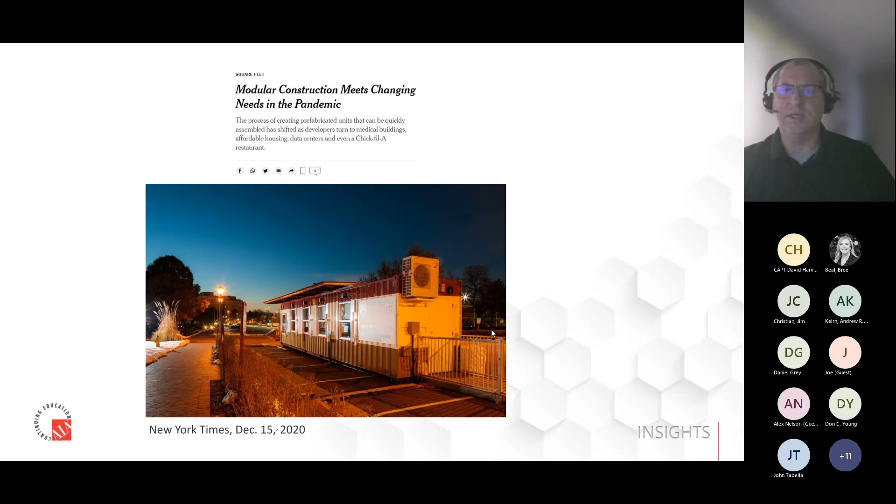So moving forward, the pandemic, recent history has really put a spotlight on modular construction. We've seen a lot of these testing facilities and the need for healthcare facilities to be brought to light pretty quick. So we've seen these buildings kind of pop up. Probably seen this in the headlines too, right? How can a hospital be built in 14 days? Utilizing all pre-built, pre-manufactured components.

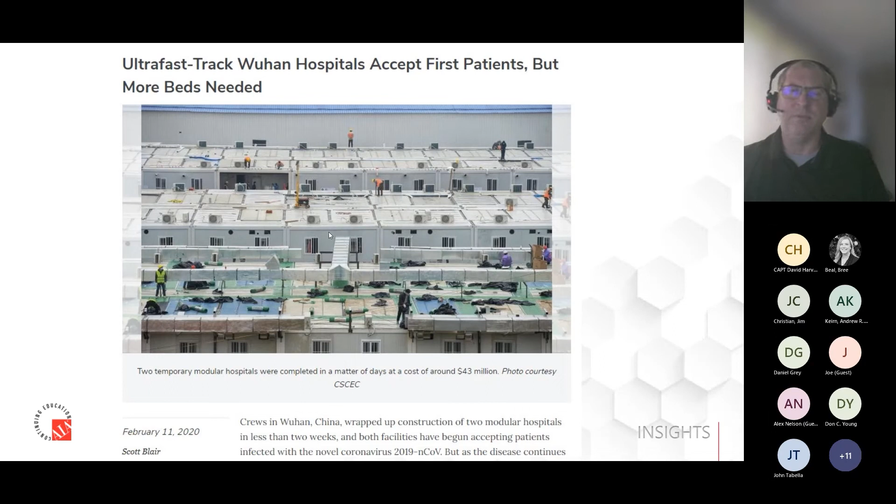So when we talk about modular construction, what are we really talking about? We're talking about off-site construction. There's a lot of terms that have been used: permanent modular, temporary modular, factory-built structures, pods, which are really like a bathroom type of unit, hybrid, projects that take parts and pieces of modular as well as conventional, and prefab. For the purposes of this conversation, I'm going to use the term modular construction, but it may apply to all these different terms.

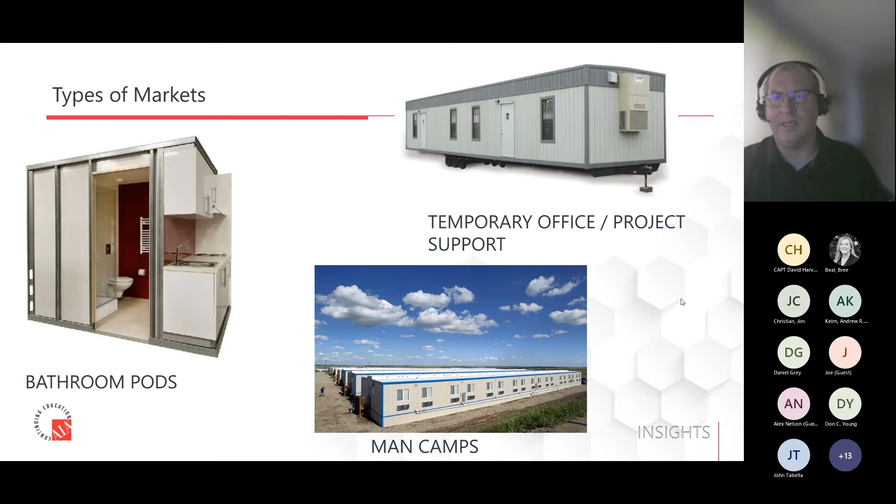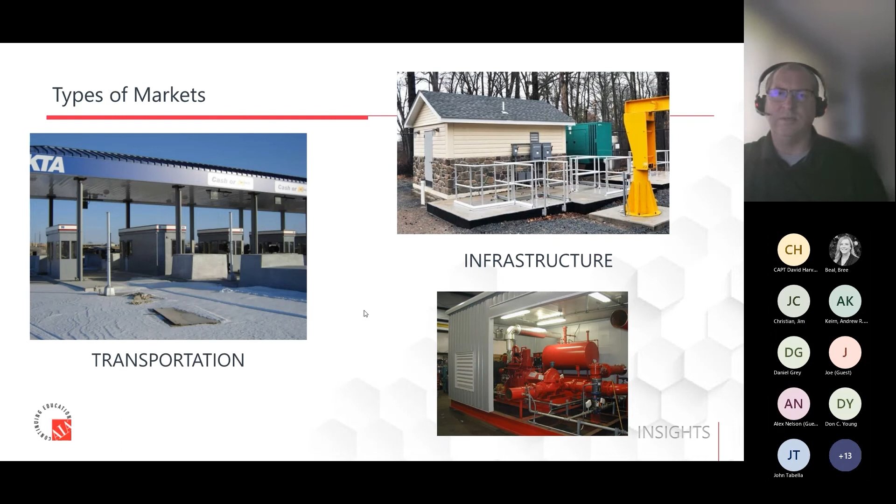What type of markets do we see in modular construction? Multifamily, mid-rise, single-family residential, of course. We have the ubiquitous trailer or temporary office project support. These are those bathroom pods I was talking about earlier. Man camps. And then, of course, commercial, healthcare, institution, transportation infrastructure. And you'll see one of the slides towards the end to be institution and federal type projects.

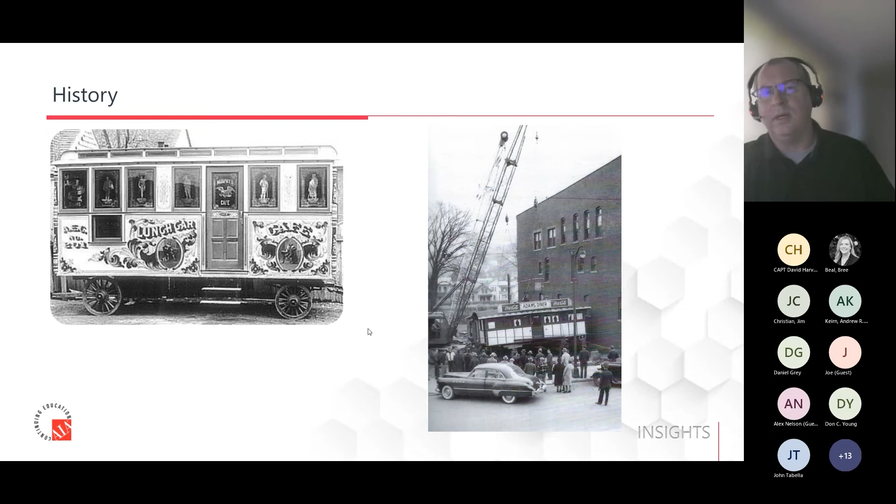A little bit about the history. There's been a lot of buzz recently. People seem to think that modular construction is a new modern technique, but really we could trace it all the way back to the beginning of the Industrial Revolution, where we had all these factories coming online, and the factory workers needed a very informal, very quick place to get something to eat. That gave rise to these mobile eateries, which then morphed into our modern day diner, as the interstate system of the United States picked up and weary travelers needed some place to stop and get a bite to eat.

So they transformed those carts, those horse-drawn carriages, into places where you could stop along roadside America and pick up. And that's what evolved into these shiny neon 24-hour places to stop and rest and get a bite to eat during your travels.

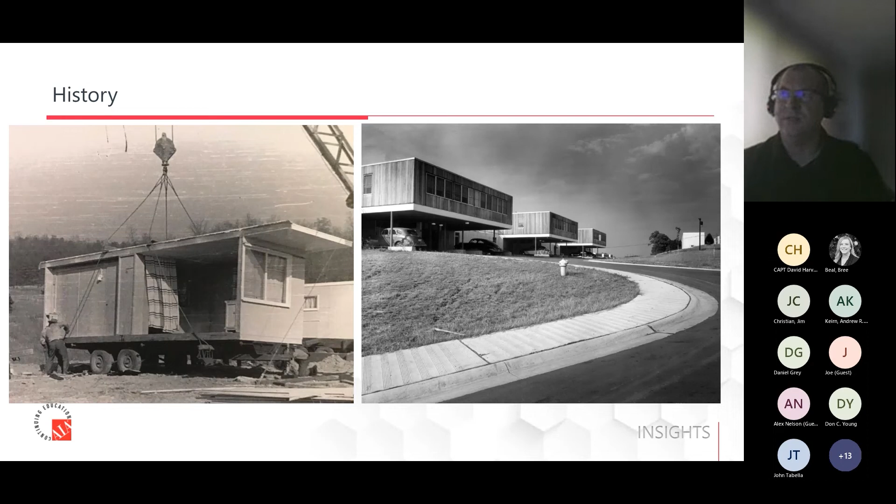In addition to that, back in the fall of 1942, the U.S. Army Corps of Engineers began to acquire vast tracts of land in 3 areas: Oak Ridge, Tennessee; Los Alamos, New Mexico; and Hanford, Richland, Washington. These 3 areas helped develop the Manhattan Project and supported all the workers, scientists, and support staff needed for that effort. This was done in about 2.5 years, back in 1945. None of those places would have been able to ramp up quickly and really affect history if it wasn't for modular construction.

1967, World Expo, Moshe Safdie experimented with modular housing using pre-manufactured concrete, creating about 354 identical prefabricated units. It was a somewhat successful exploration of modular housing. However, it was so popular that the value skyrocketed and economically it didn't turn out to be the best use. But again, in the mid 60s, architects were experimenting with this type of construction.

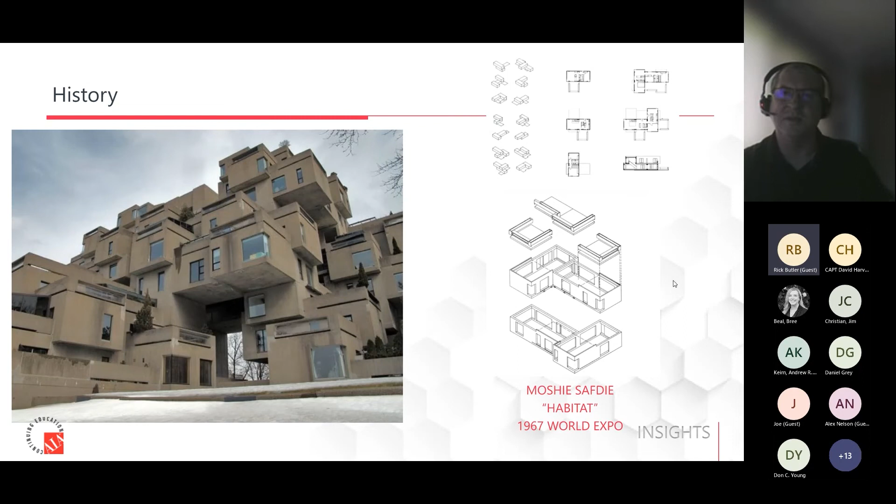Disney theme parks. Disney has used a lot of different modular techniques extensively throughout the creation of their parks. And over 30 years ago, there were modular manufacturers building multi-story, campus-sized projects. So again, modular construction isn't necessarily a new technique or new technology. It's been around. It's just been continually improved over time.

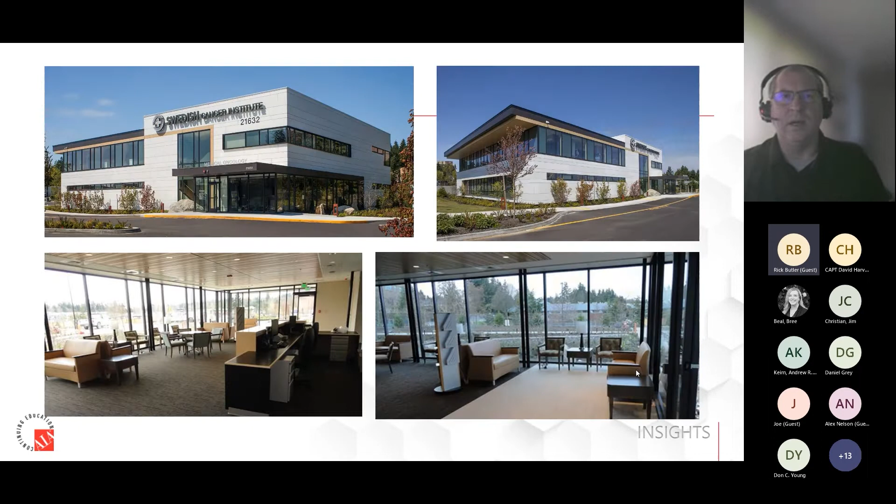The industry has been adapting it. The AIA provides a guide on modular construction. Clemson University offers classes that you can take on modular construction. So, and again, I'm sure everyone on the phone call here has heard about it, has experienced it, has somewhat been affected by it. Modular construction has, and we're seeing the popularity kind of grow in this market, in our industry, and it's starting to really take off here and be good.

So what do I believe are the values of modular construction? So if you have a project that has a time component, has a technology component, or has a financing component, those are probably the 3 biggest items or value that using a modular-based project would help. I'll talk a little bit more about these.

So time, the biggest time is that you're providing your client with a solution months ahead of schedule. For projects that are revenue intensive businesses, the results can be significant. Great example of that is the cellular phone industry. At the time it was AT&T, Sprint, and I forget who the other player was, but obviously the first people to get up, get their towers and get their cell units up and running as quickly as possible, that's where they gain the market.

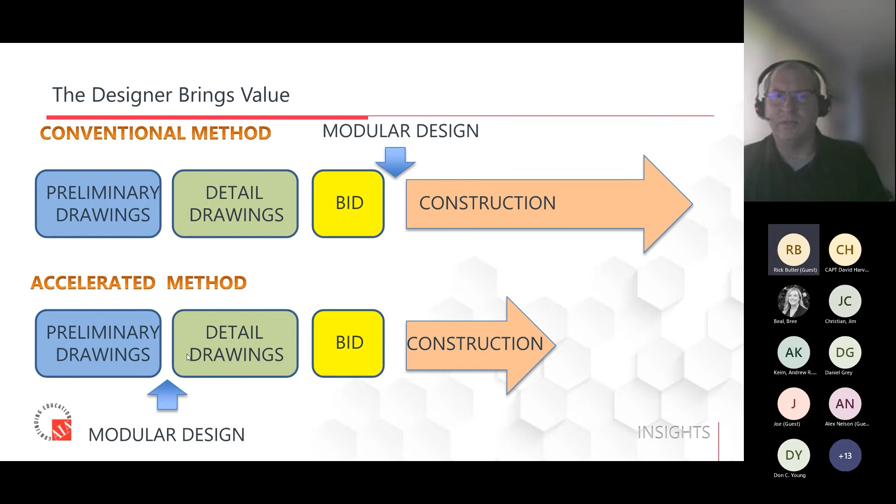So as a designer, where could we bring value by using modular design? The best area where it would be advantageous to introduce modular design is right in the preliminary stages. And I'll talk a little bit more about that on some further slides about why this is important. But typically, a modular design is really kind of brought in after the bid because there's the thought that modular design might be a little cheaper or more cost effective, which may not necessarily be the case. But if you're looking to provide your clients with an accelerated schedule, right after the preliminary design would be the best time to do that.

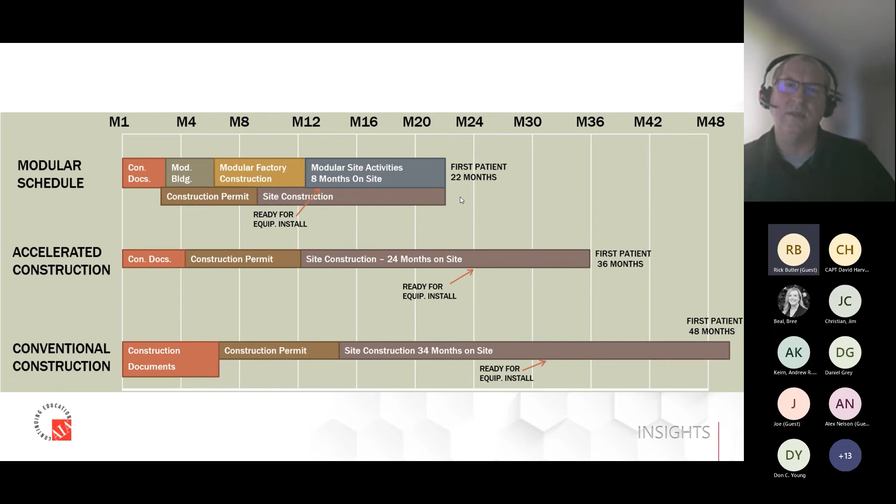Technology. There's a lot of different building types and approaches that may benefit from modular construction. Sometimes factory construction may offer superior solutions over local or regional resources, especially if you're building in remote parts of the world where you may not have materials available to you or the local workers to put that project together.

And one of the bigger, more important items is the relocatability. Some modular buildings, if they're designed and planned accordingly, the ability to be relocated offers clients a lot of business flexibility. I've seen clients that have wanted to test markets and not wanted to create a permanent solution in one place. So they developed a project that could be moved to test different markets. And then depending upon the outcome, they would expand or further their offerings.

Financing, and this could be a presentation on its own, but again, I'm providing a brief overview here. So modular buildings can be treated as personalty instead of real property, creating accelerated depreciation opportunities. And depending upon if your client has available capital or has capital issues, this is something that may be very valuable to them.

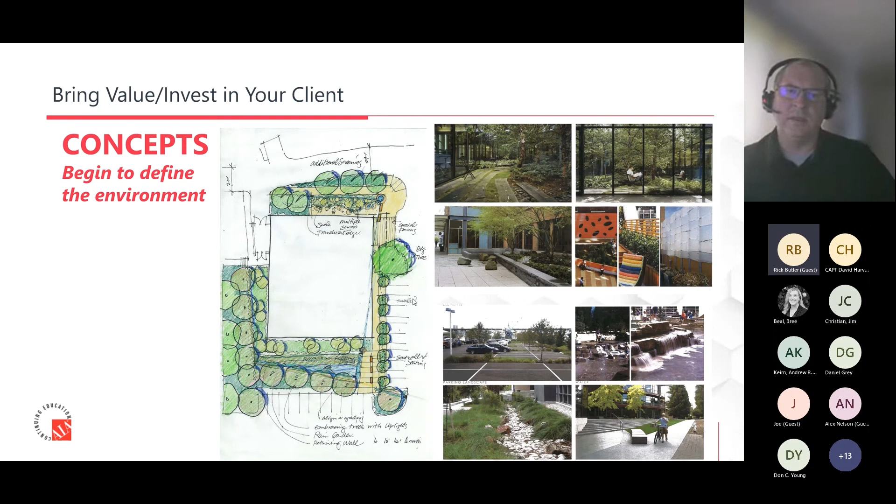In order to promote that, like any other project, you want to invest in your client, create concepts, begin to define the environment, kind of be the proponent for selling modular construction, show them the benefits, kind of bring them up to speed and be a champion for that.

So you have a client, and 2 or 3 of the previous items kind of qualify the modular building fit. There's a time component and a financial component that the client's interested in. They said, okay, go ahead, start moving forward with the modular solution. We want to really learn more. So as architects, designers, constructors, we start looking into the modular industry and seeing what kind of solutions are available.

The biggest question that I would advise, when you're looking into the modular solution and you start contacting different suppliers, manufacturers, dealers: are they selling a service or are they selling a product? Within the modular industry, there's dealers, there's manufacturers, there's contractors, there's design builders, and each one of them offers a different part or piece. And it's really helpful to know exactly what they're going to do.

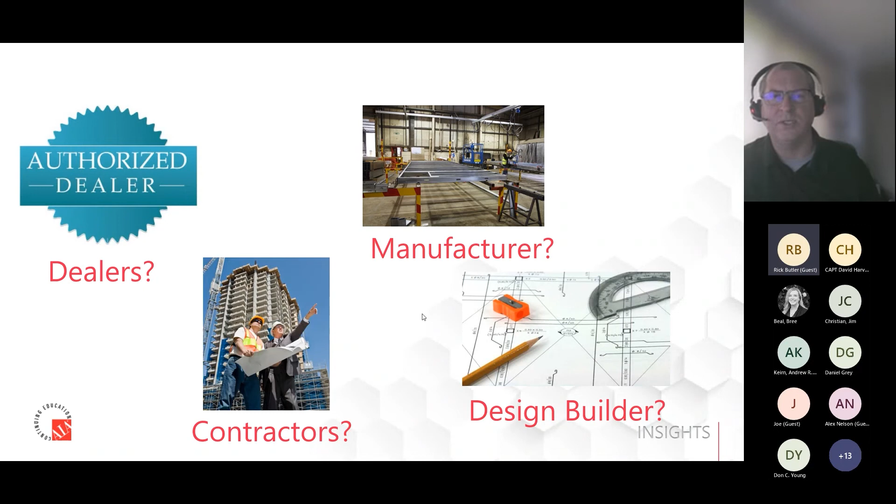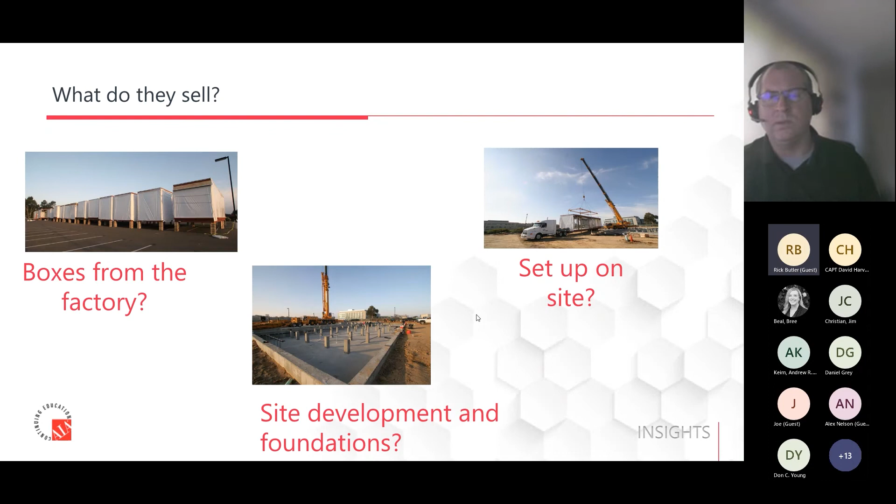Do they just provide the boxes from the factory? Do they also do the setup on site? Do they do the site development and foundations? And so as you're evaluating your strategy, these are some questions to ask. Because the industry has grown so much recently that there are different parts and pieces, and you want to know what you have to prepare for, what you have to plan for, what you may have to document, what's going to affect the outcome of this project.

Do they also sell equipment? Do they also do design services? Do they also provide the financing? So again, there are people that will provide full turnkey services. There are also people who will just do the box and say, here you go. It's up to you or your contractor or your architect to figure out how to do the site, how to make it work.

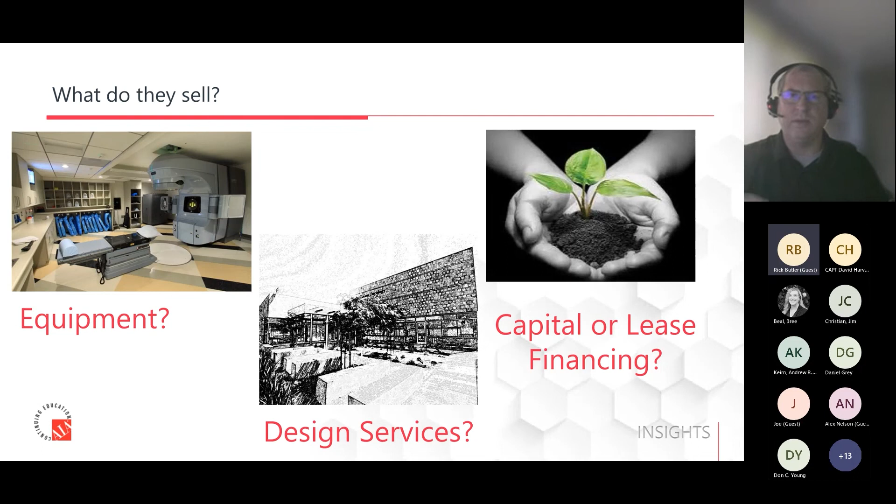So how do you compare companies and solutions? Much like you would any other product, right? Scope comparison. You're going to take both scopes side by side, evaluate them with your team, see who's providing what and what's going to provide the best solution. Of course, cost comparison always plays a big part, depending upon what your outcome is and where your budget falls.

Sometimes modular construction is not necessarily the best solution, especially economically. A lot of people seem to think, at least in my experience, that modular construction is cheaper than standard construction. And that's not necessarily true. There's other aspects, and I'll get into them in a little bit, that may affect that cost.

History of performance is extremely important, especially in the modular building industry. If you're looking to do a 3-story commercial type building, perhaps the guy that's building the construction trailers says he can do it, but he may not be able to. So certainly look into resources, see what projects they've done. Again, this parallels conventional construction: looking at the history of performance, looking at client resources and past customers and getting their take about what they were able to provide and how that building turned out.

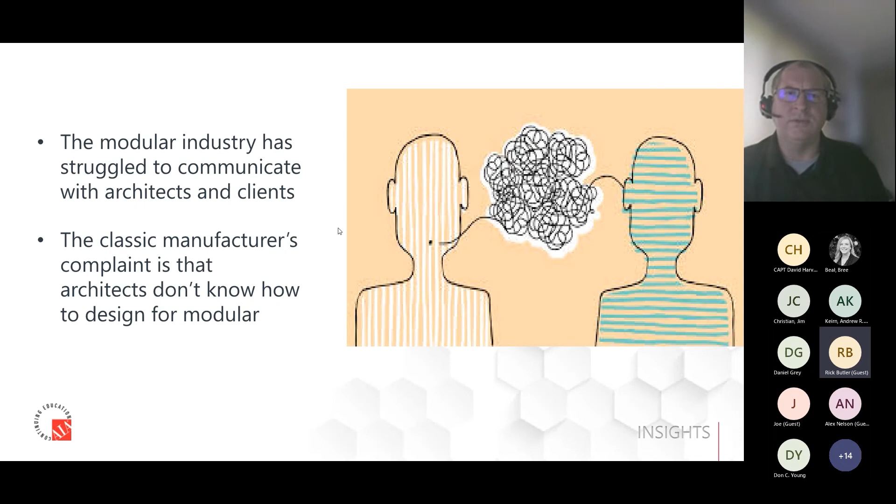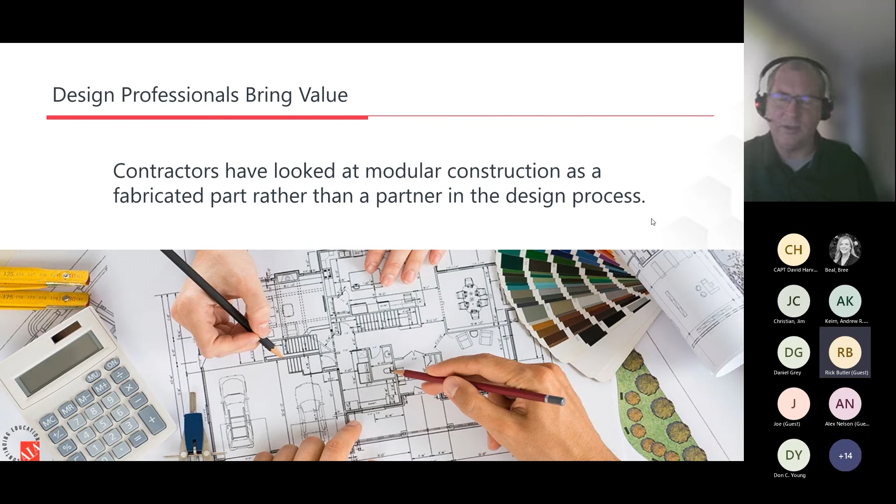So as a design professional, it's been my experience, even when I was on the contractor side, that contractors look to modular construction as a fabricated part rather than a partner in the design process. And this ties back to what I was just talking about: you definitely want to have an integrated team that has started right from the beginning that can help bring all those values of the time and the technology and the financing and create a cohesive project.

So a little bit more specifics about modular construction, creating specifications and thinking about different parts and pieces that go into this from a very high view. Bidding the project versus sole source has always been one important topic right off the bat, and that may even determine whether or not a modular solution is really the best solution, because like with any commodity, if you're going to go with the lowest price, it may not be the best product, especially if it's through the bidding process.

Again, I spoke about this. Involve the modular manufacturer from the beginning, right? If possible. Sometimes it may not be possible during the design, in which case, if you think you have a project that may lend itself to a modular solution, look for a professional.

So where do we leave off? Details, coordination, connection, systems, and scope. There are 2 or 3 other layers of coordination that will be needed if you decide to go with a modular construction solution. There's going to be mate lines, there's going to be mechanical coordination, other elements that will have to be discussed and coordinated. So there will be a little bit of extra time and effort involved with that.

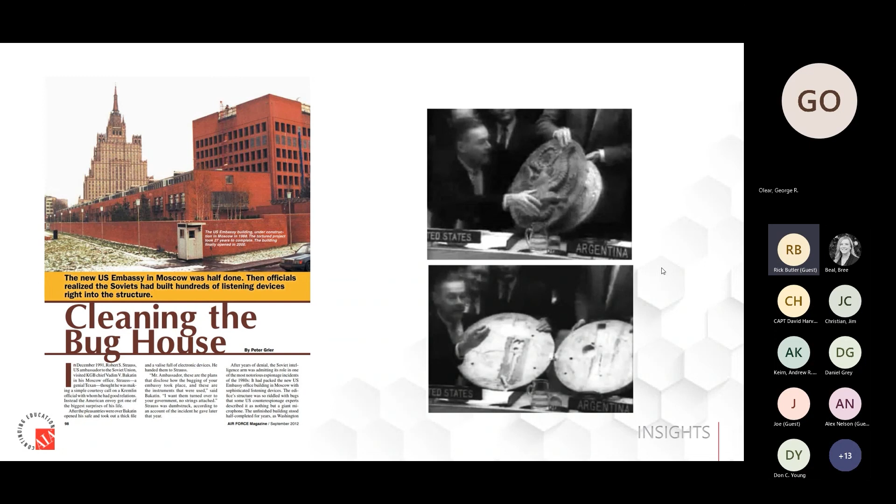So the first project that I'm going to highlight that may not have been possible without modular construction is a modular embassy in Tajikistan. This project was really born out of, I think everyone knows about the bugging of the Russian embassies and the security concerns that were created. So a modular building company at the time had an idea that, well, we can really solve a lot of this if we perform some of these processes off-site and bring the building to the site. We can build the building in a controlled environment with all the security concerns in place, and provide that as a value.

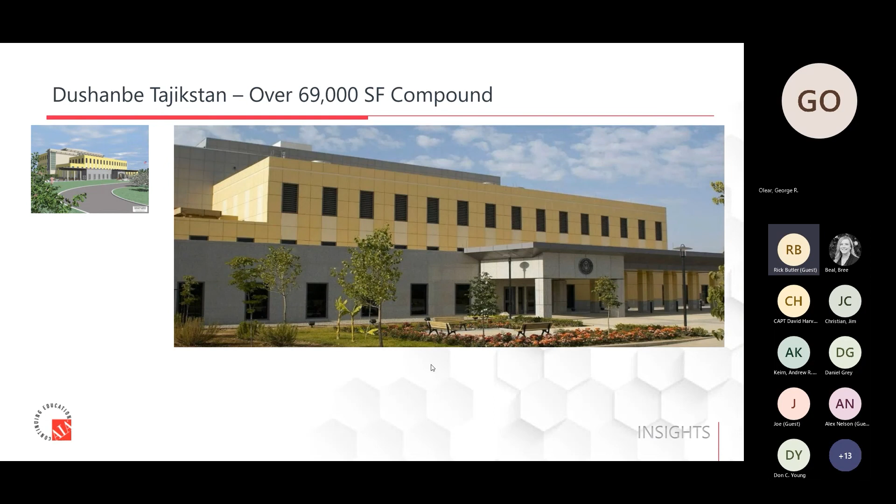There was also a time component to this project. This project did need to get up and running very quickly, and having a modular building approach when compared to conventional construction on site, there was value there. And the same thing with local resources and materials. There really wasn't that skilled workforce available at the time that could provide this type of project.

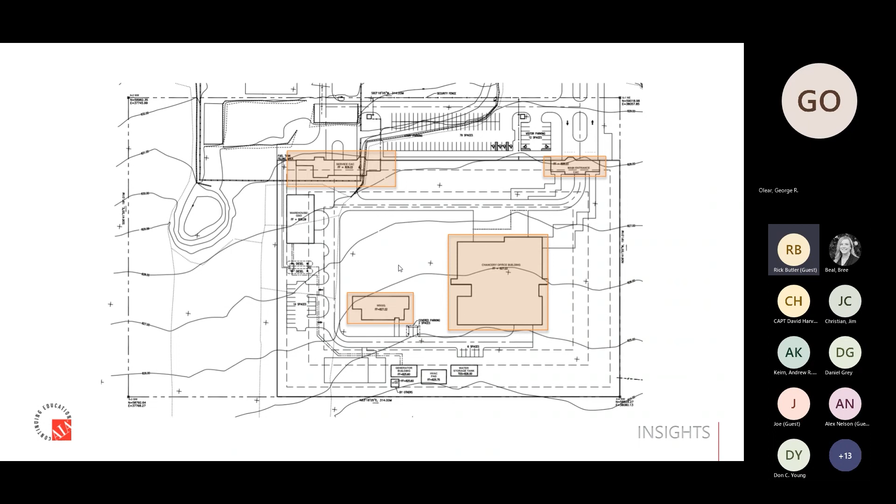This project actually consisted of four modular buildings: the chancery building itself, the two controlled access points, as well as the Marine Guard quarters, all modular buildings that were built off-site and transported and moved to the site.

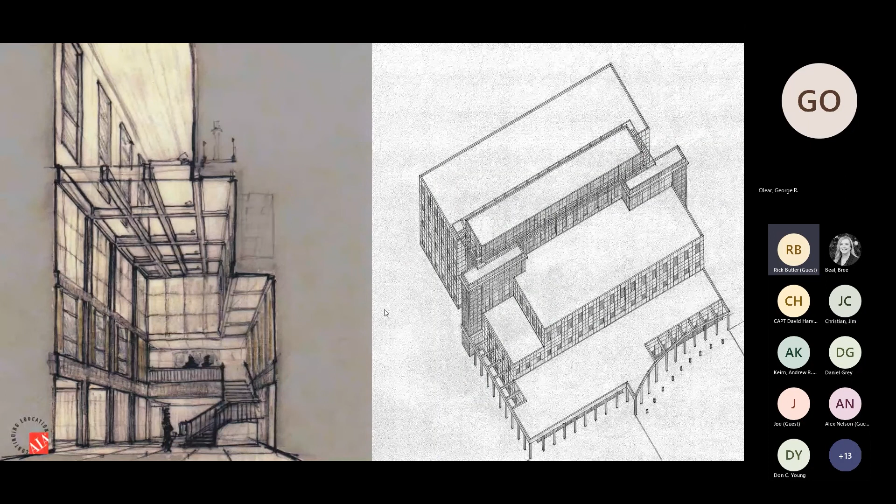Again, we started right from the beginning, right from day one. We approached this project, wanted to integrate our client, wanted to show them what was possible, wanted to engage them and sell the process to the client through different forms of architecture and drawing and get them engaged. This building benefited significantly from the use of modular construction. So some of you may be aware of the standard embassy design.

This project was based upon that concept, and it lended itself very well to modularity based upon the 3 by 9 meter grid that was part of that initial standard embassy design by the State Department. These modules were 3 by 3 by 9, and afforded us to break that plan down into multiple parts and pieces.

The plan itself, or I should say each module, was 9 meters, in which case you'd have a cluster of 4 columns. We did have intermediate columns that were spaced, but again, since the modular builder was involved right from the beginning, there was a lot of discussion about where those placement of columns can occur.

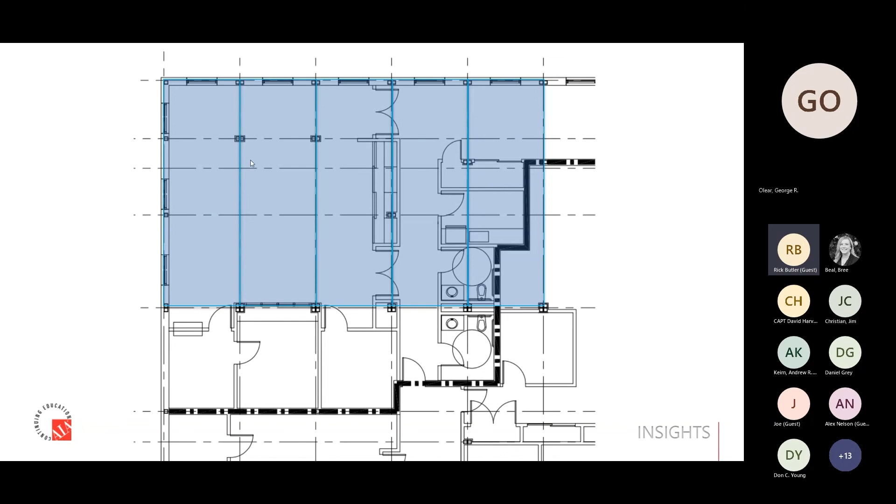So one of the reasons why this was achievable and able to be modular was typically a lot of the forced entry requirements, ballistic requirements, were traditionally done with concrete, different thicknesses and things. And the modular builder came up with a unique solution of using a combination of steel plate and steel tube systems, which adhered to all the State Department guidelines with regard to security and blast resistance, and provided the ability to make this a modular building and be built in the United States and then shipped overseas.

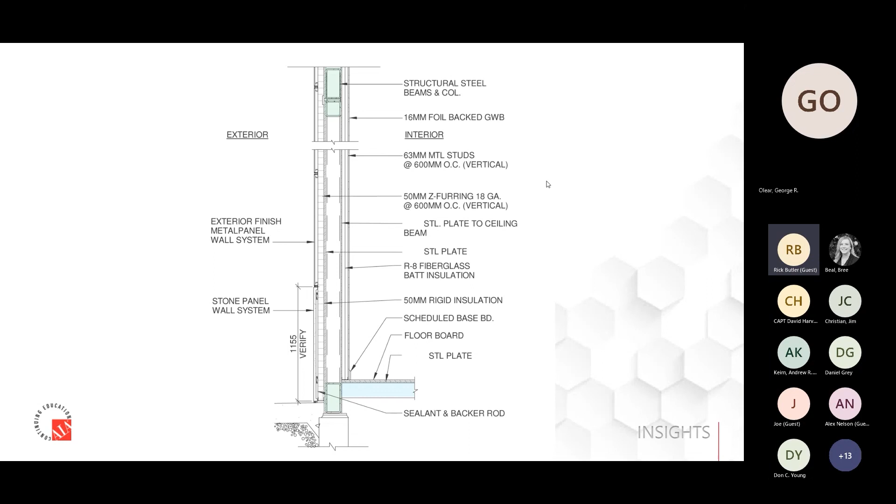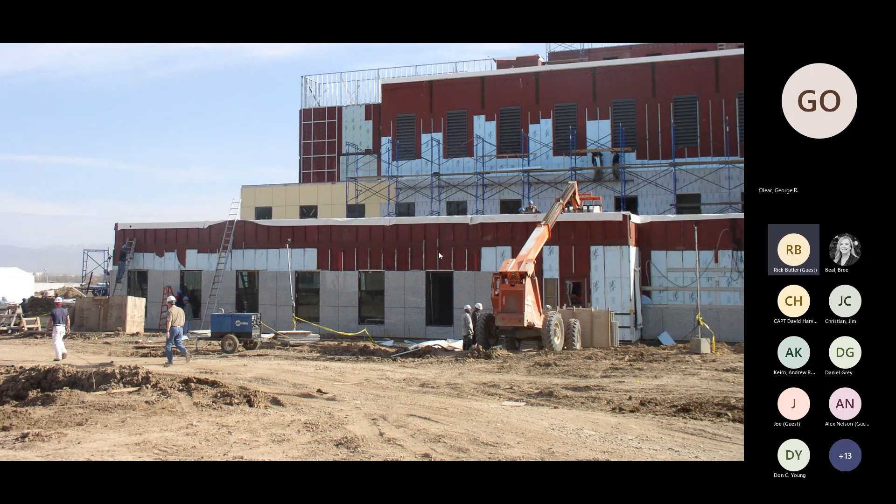Again, you can see the modular components where some of these columns were located here. Just kind of go through here. So again, due to the nature of the modules and tying back to some of the topics I talked about earlier with regard to shipping, it was decided that the best way to do it was to ship the modules probably about 80% complete, but have the exterior cladding be done on site. This was a combination of stone panels as well as metal panels.

And again, the stone panels coupled with the modularity of the building really created a very achievable and constructible solution to the exterior that could be done on site. These panels were manufactured again in the United States and then brought over to the site and applied there.

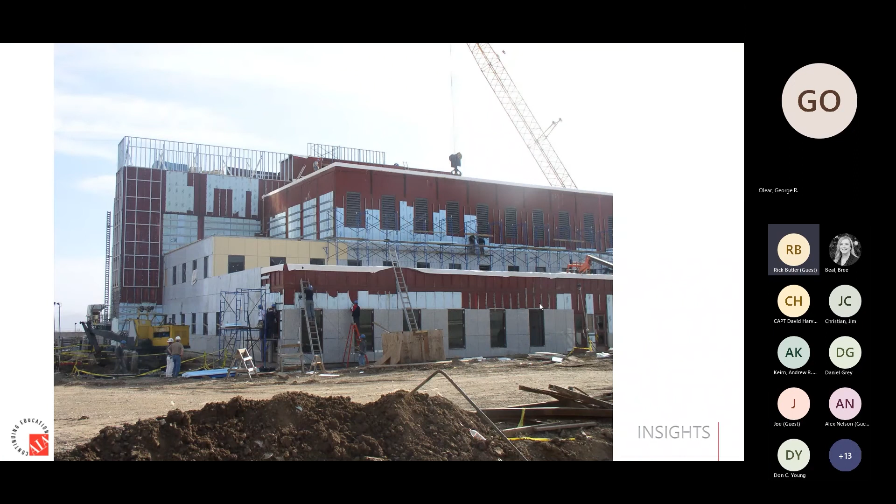And this was done a couple of times. There were at least four different embassies that were constructed in this way using this technology because of time, resource, and available materials. For some of the modules, we did use the Antonov, and it was quite an experience seeing these modules loaded in there and flying them. A lot of the secure modules were done this way in order to make sure that we could, again, comply with all the security concerns.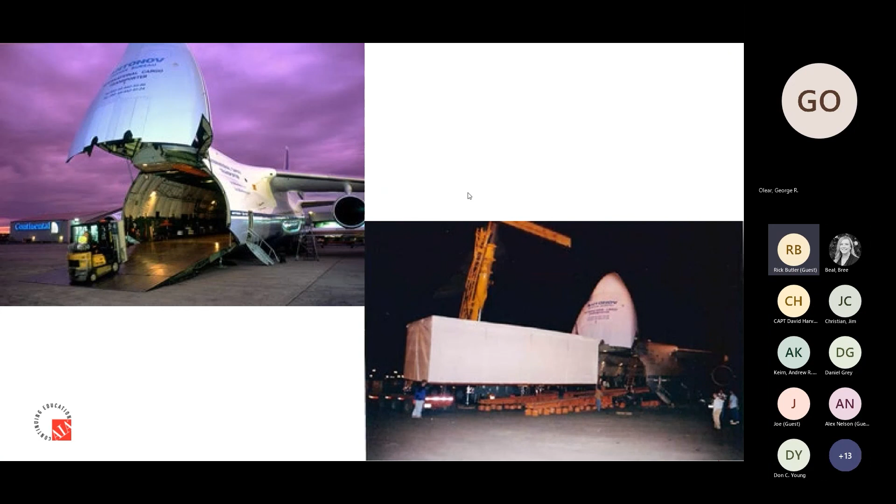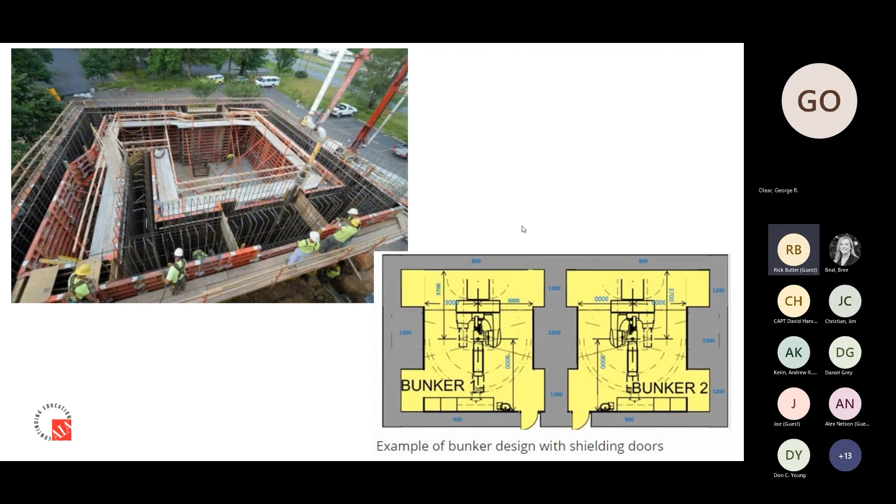This project, obviously, is not relocatable or movable by any means, and the client is kind of left with what we used to call a concrete legacy in place here. It takes months to build one of these vaults, and then if you have a multiple vault situation, it just literally doubles the time. So you can, again, get a sense of really what the structure is involved here.

And so the reason why concrete is really used for these types of structures is the fact that concrete does two things. It provides a structural envelope for the building, but more importantly, it provides the shielding that's required due to the doses of high radiation that are generated by that equipment. So concrete really provides two things: structure as well as the shielding that's required.

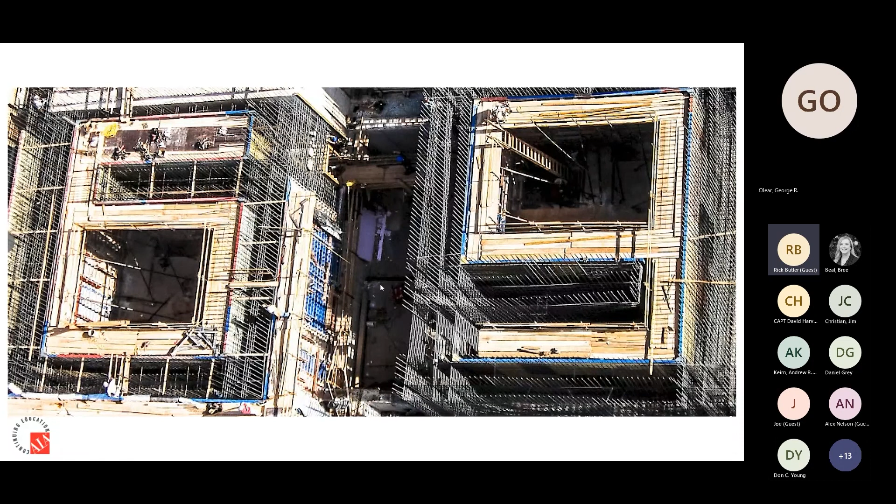So a company came up with an idea to make this a modular solution, looking at it from the fact that, again, there's a time component that's involved with the building of these vaults. Sometimes there is that financial component, and then there's the thought of being able to move the vault. If there's a healthcare client that wants to test other markets, they have the ability to pick this up and move it and explore different options, business models.

And of course, there's the financing. The fact that it is a modular building, it's actually treated as a piece of equipment, and it can be financed as such. And the way that the company went about innovating this is they decoupled the shielding component from the structural component. So utilizing a steel box, like a steel vessel, more or less, they would fill the void,

this void, and that's kind of shown in fluid connection, with material that would provide that high density shielding that's required. It was flowable. It's almost kind of like a sand, which will enable them to pump it in pretty quickly, get the building up and running on site. And if the client ever did want to move it, they could literally come in here and vacuum out the shielding, unbolt the modules, and move it to another site.

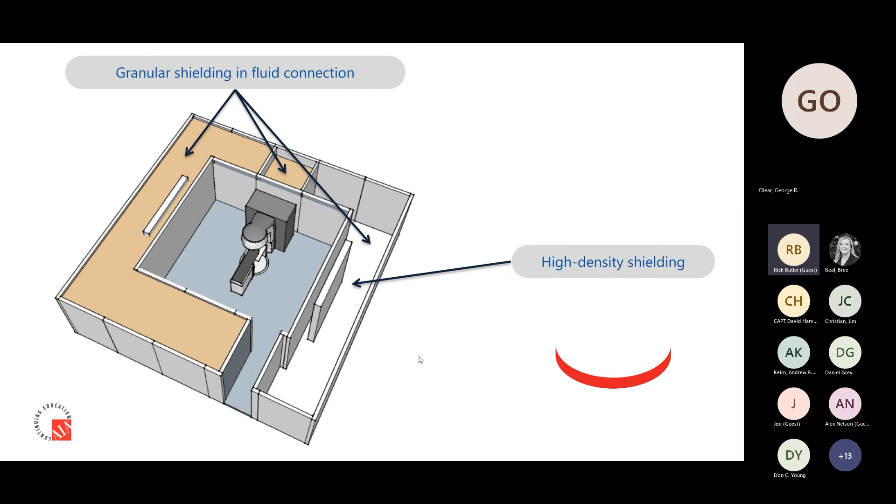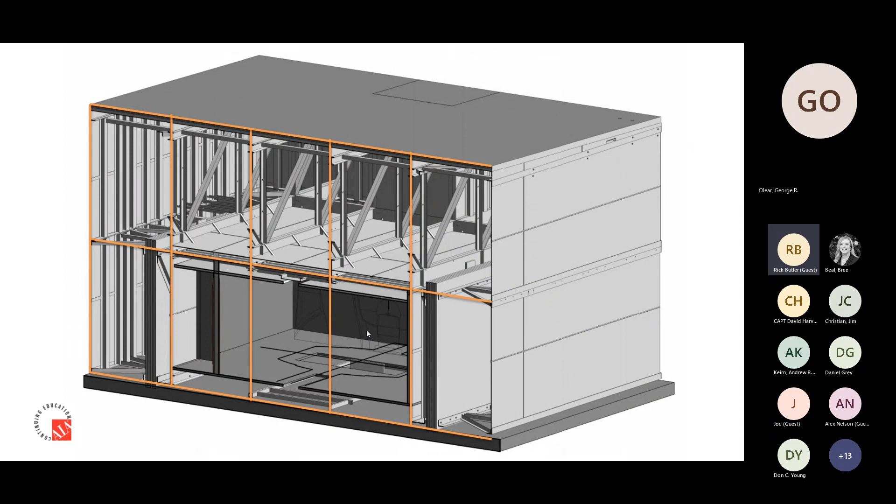This vault construction takes a matter of hours. You can put a vault up in about a day as compared to 4 months. So therefore, you can see the time advantage of bringing treatments to site, of getting patients treated quicker, the economic advantage, and then of course in different healthcare markets, getting ahead of your competition.

So this building here was Moore's facility. This is in San Diego, California. The existing facility was a brand new facility. 3 years after it was constructed, it was already over capacity. So they had the need to add 2 new linear accelerators to this site to offer additional treatment.

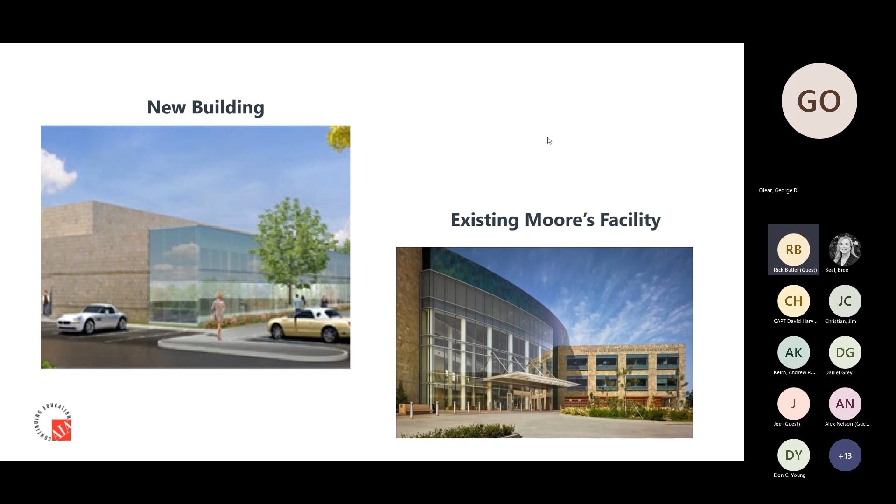This entire facility was modular, not only the vault, but also the rest of the building. And this was a true turnkey solution. The dealer who provided this solution was able to provide the vault solution as well as space for the rest of the clinical operations, such as other imaging, exam rooms, nurse station, waiting areas.

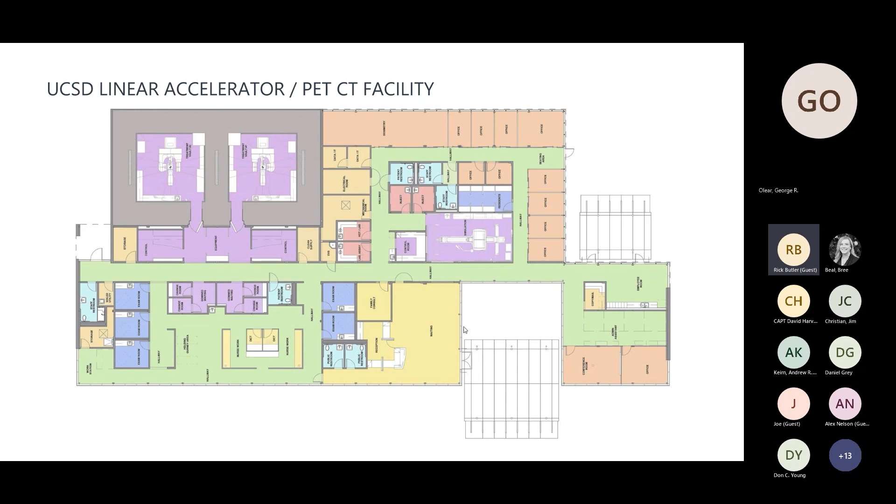So here again is the foundation in place, and while this foundation was being placed, those modular units were being manufactured off site, significantly saving time. One of the big aspects was the time component. Any work that was going to be done on the site, the hospital estimated it probably would have taken about 3 years to get the funding done, to get the approvals, to go through regents, and get all the approvals needed to do this project.

Taking a modular approach, they were able to cut that schedule in half, if not less than half, because they were able to use the unique financing available to them to do an off-balance sheet approach and treat the building as equipment, and therefore they were able to kind of bypass all that parts and planning. In addition to that was, again, the time on site versus the time in the factory of building simultaneously.

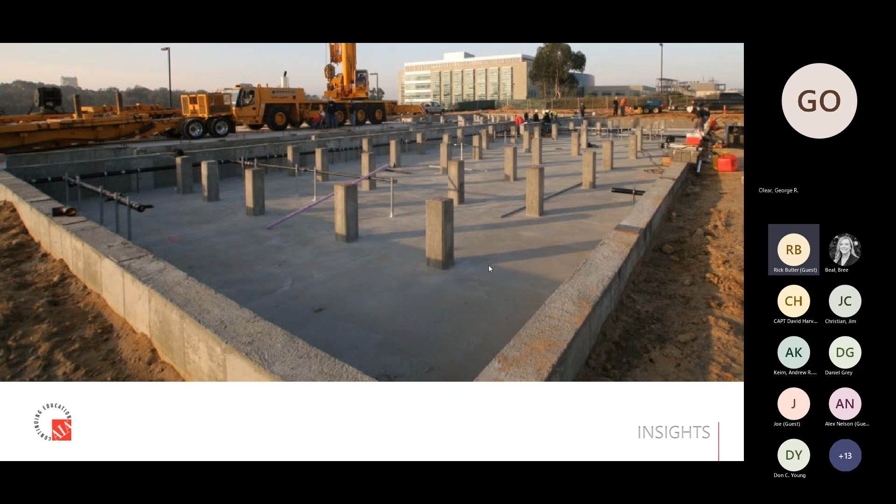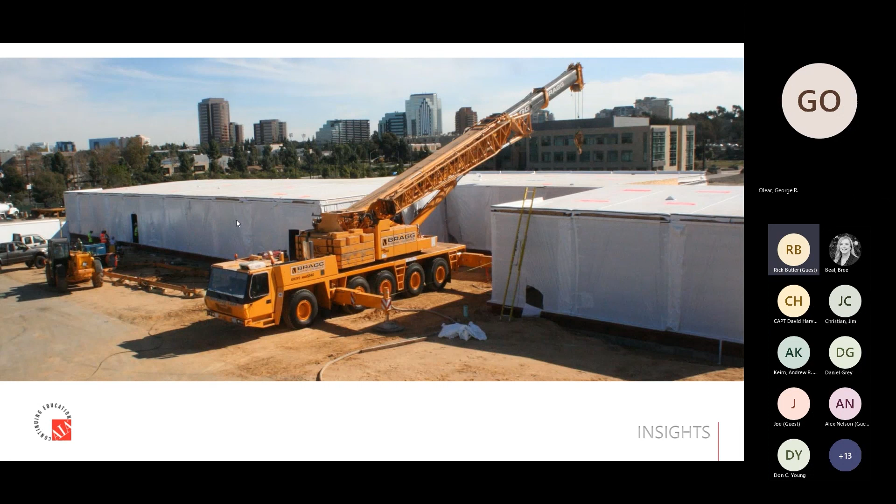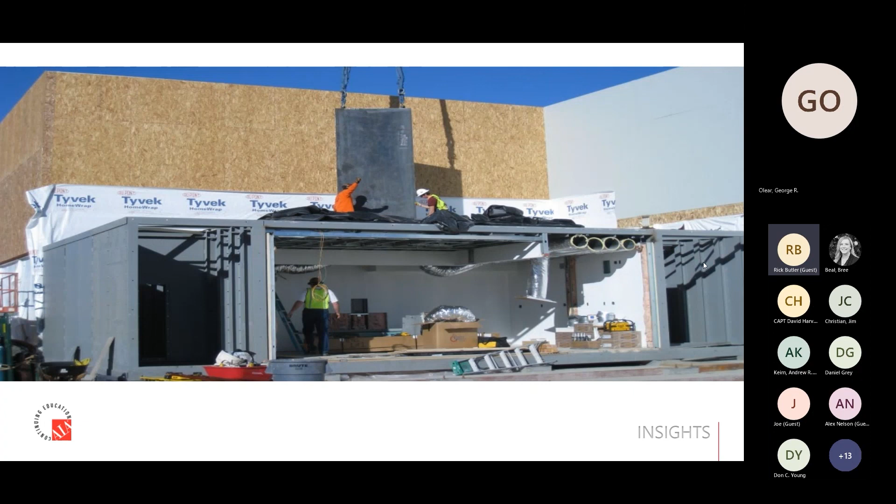So here's some pictures of the modules actually being set. The clinical portion was set in about 2 days. So 2 days worth of work, and we had a building that was about 70 to 80% complete on site. Some examples of that modular solution for the vault. Again, these areas here are the areas that are filled with that aggregate that could be flowable and pumped out. And then there was some high density shielding beyond that.

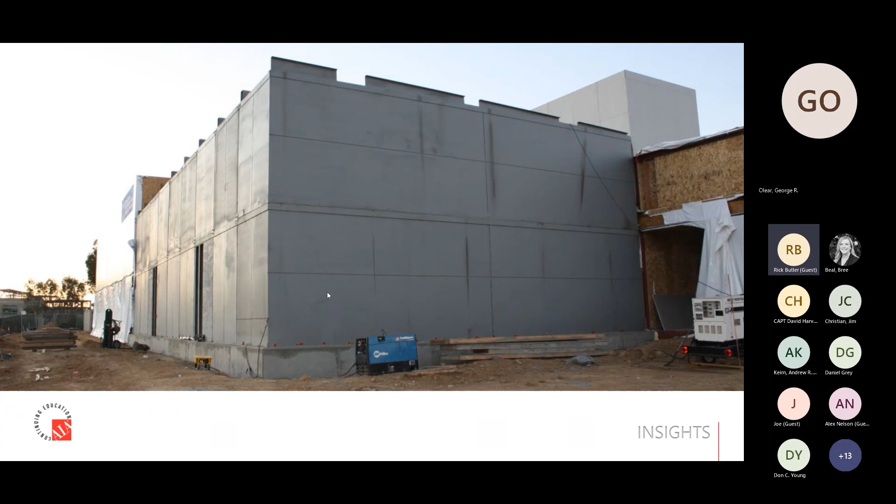The other component of this was the technology that was used. In addition to being able to provide a modular solution, the manufacturer at the time also provided these what they called hatches, and that enabled the equipment movers to move the equipment in and out without having to jackhammer concrete, having to remove a base frame, having to disrupt the inside of the rest of the facility. So when we start talking about technology and how that's integrated into modular construction, there were many attributes that were afforded by using this construction, and that added a lot of value to the client.

The building was clad in a stone panel, which again, as I discussed earlier, as you start selecting materials and parts and pieces that actually qualify the building to be a modular component, this is one of those decisions and details that need to be thought of in order to have the building comply to be considered modular and a piece of equipment with regard to financing solutions.

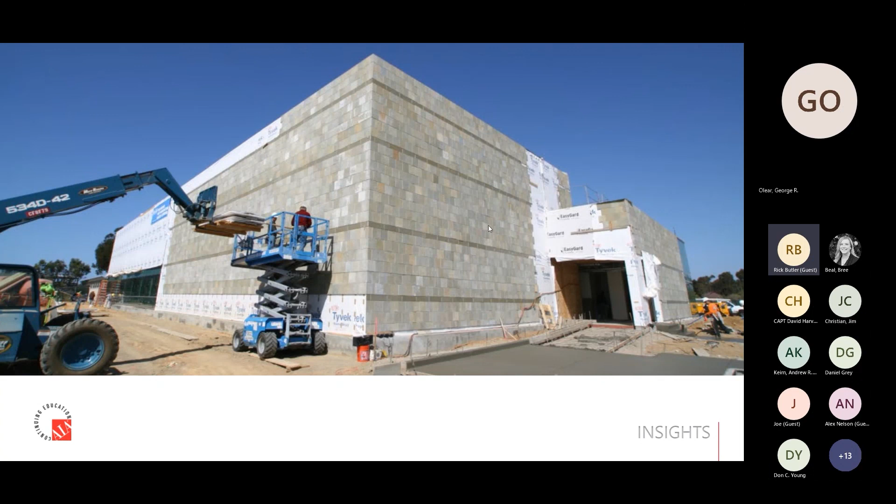And so walking into this building, the modular builder provided everything with the exception of the furniture. And again, tying this back to what I was talking about earlier, what is your dealer providing you with? Are they just delivering boxes? What are they going to be doing for you? And everything here, again, with the exception of furniture, was provided and done by the modular manufacturer and dealer.

And again, this is the exterior. The curtain wall was done. Parts of the curtain wall were done in the factory. This parapet portion had to be done on site, but again, in order to create the massing, in order to create a great architectural solution, have it blend seamlessly with the existing building in the background, it was able to be achieved using modular construction.

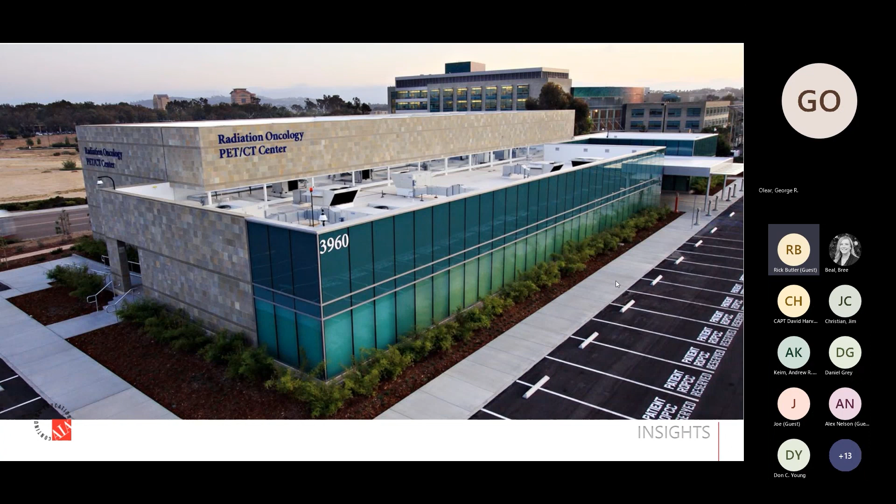It makes sense for them to come put this up in a parking lot or an adjacent piece of land, transfer their patients over to this building, treat their patients, so they don't lose their revenue, they don't lose their patient flow, they don't lose their staff based upon any downtime. And again, that wouldn't have been possible without the use of modular construction.

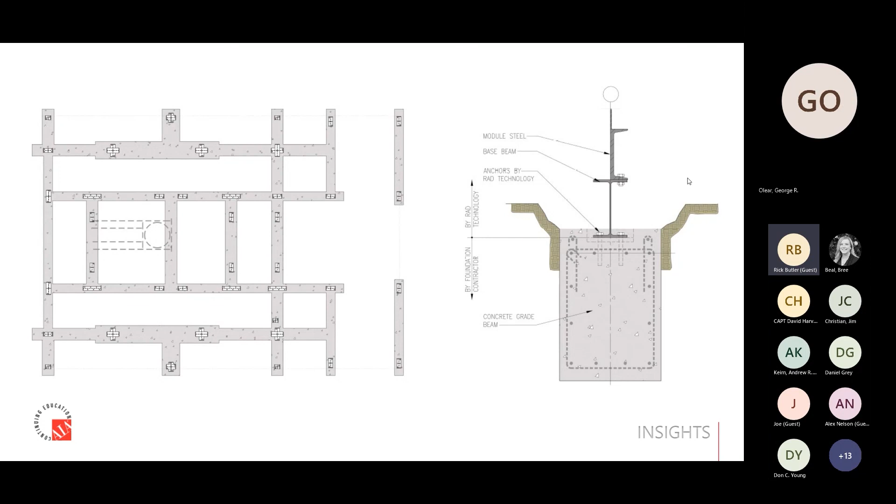RAD Technology, some very unique foundations were developed to accommodate that. This foundation was designed so it can remain in the ground and be covered up very easily. So in the future, if they wanted to bring the building back, they can reclaim the foundation and still use it and maintain some of that investment that was done.